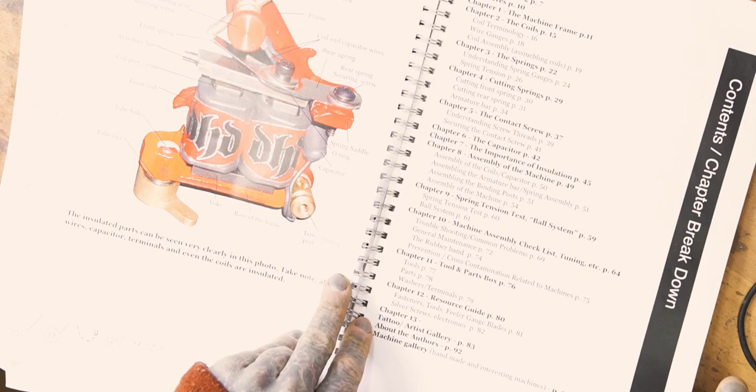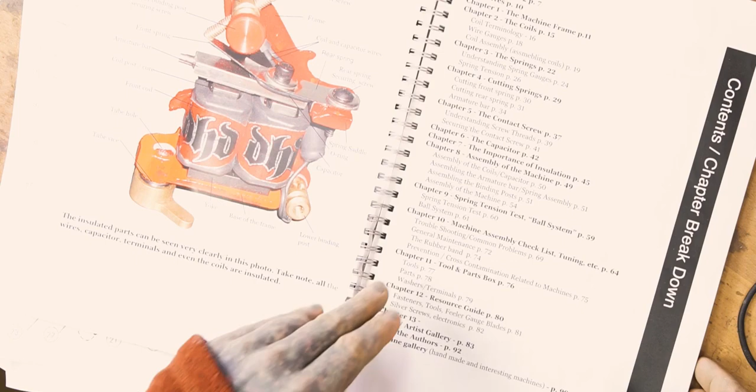I love it, you know. I'm all in for Godoy machines. And yes, as I say, I can recommend that book. It starts with machine parts. It's basically what we do. It explains where all the different parts on the machine are. And machine frame. So we basically go over the book with my own words to explain everything. So let's take a look into the machine.

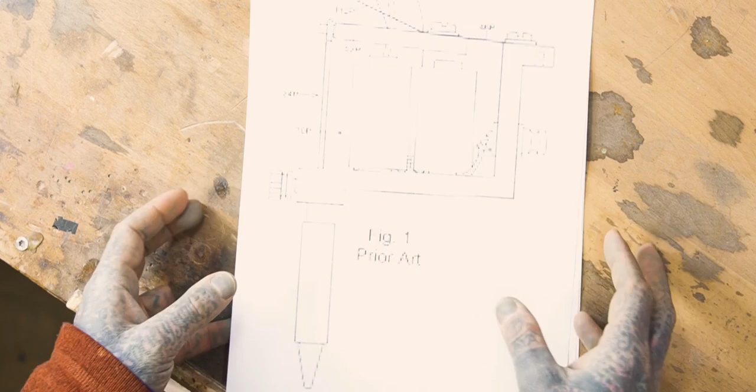I found a few illustrations on the internet, which I will use to paint on. Okay. So first of all, it's very important that you understand the tattoo machine in itself. How does the tattoo machine work? And I will show you that on the paper here. I hope you can see that properly.

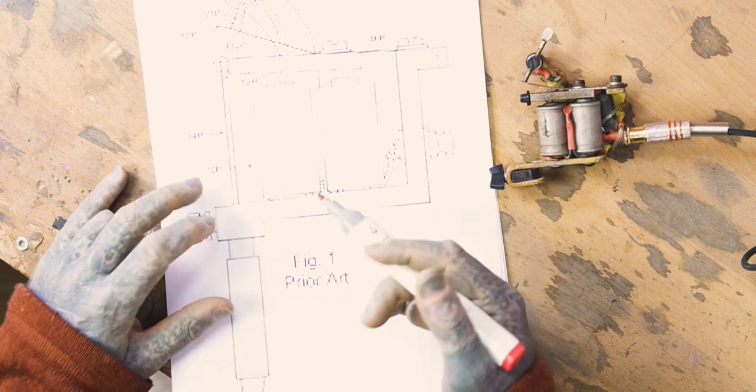So first of all, you have the frame. The frame is holding everything together. In the frame you have the coils. Coils are nothing else than an electromagnet. And it works pretty simple. Electricity goes in and it makes a closed circuit, and it makes an electromagnet here. The electromagnet pulls this metal piece, the bar, which is movable. It pulls the bar down.

And you see that in the moment it pulls the bar down, the spring comes off the screw. And that is where the electricity runs. So in that moment it pulls it down, there is no electricity running through it anymore. The electricity breaks off. And what happens when the electricity breaks off? The force from the magnets goes.

And you see when I let the force from the magnets go, the spring makes the bar jump back up. And in the moment it jumps back up, there is a connection again. So that means the electricity runs through and it repeats. And this is what a machine does very fast. It holds the electricity, it breaks the electricity. It holds the electricity, it breaks the electricity.

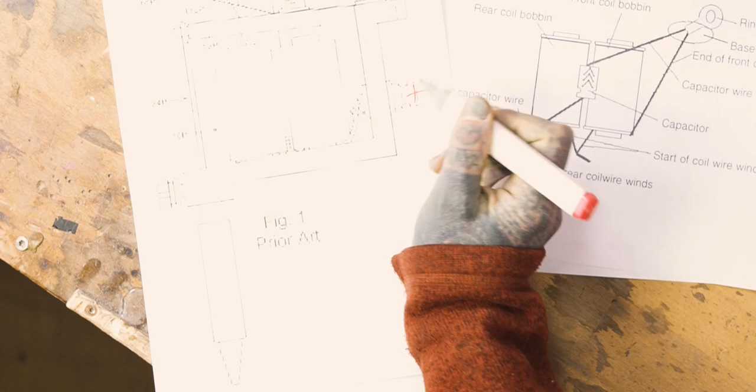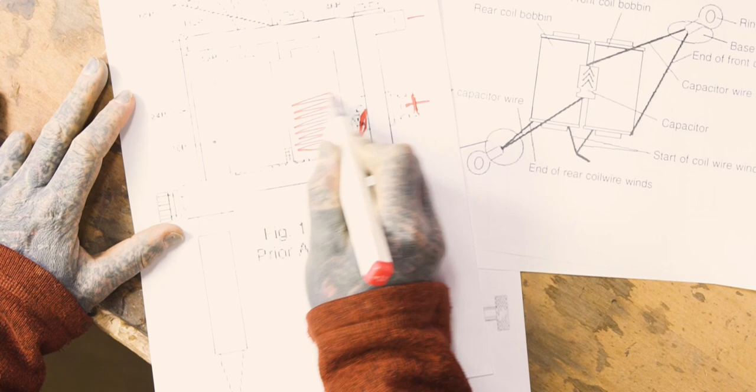Let me see if I have a better one where you can see the cables. No, I'll paint in the cables. So what happens? Here, let's say, is the plus and here comes the minus. And that cable runs into the coil. The coil is wrapped around, up and down and up and down, usually 8 times. 8 wraps, we will come to that later on.

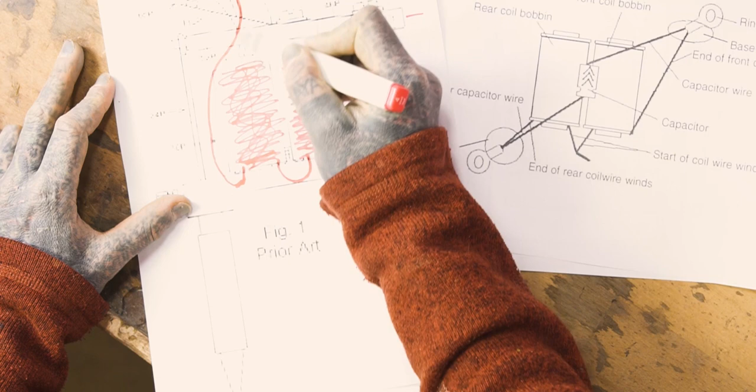And then the electricity moves on into this coil. Here it wraps the same 8 times, up, down, up, down, till it comes back to the bottom. So here, that cable moves up to the screw. And from the screw, let's go till here. And this screw is not connected to the frame. So this screw that comes in here in the machine is disconnected from the frame.

There's usually a little rubber inside here. I will show you that when we disassemble the machine. And we should see that on here. Yes, you see this part, let's mark it green. This part here is insulated with plastic or rubber, something the electricity doesn't run through, because you need to stop the electricity, because our minus from here goes into the frame.

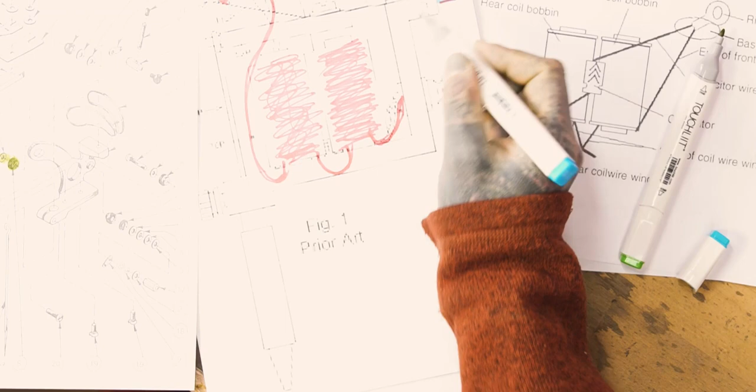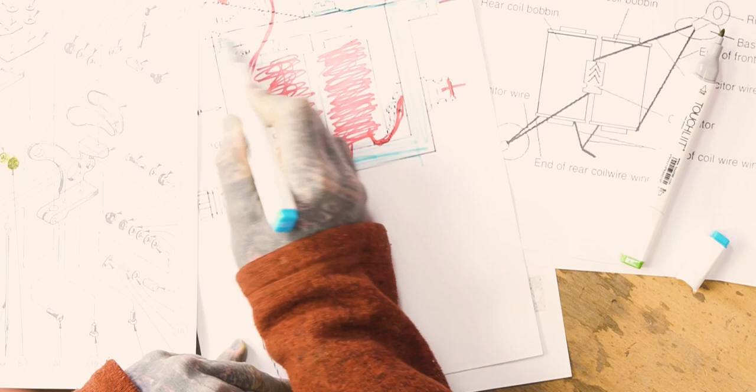So our minus is everywhere. Our minus is basically everywhere. It goes in here. And you see even the back, the full frame.

The full frame is blue, is full of minus electric. And also here, I forgot to mention, here you see there's also the green isolation. So it makes that the plus is not in the frame. The plus is only in the wires. And basically the magnetic field is also blue. And it doesn't matter, because when we later go to the core, the core is isolated. That wrapping here is isolated anyway, so don't worry about that now.

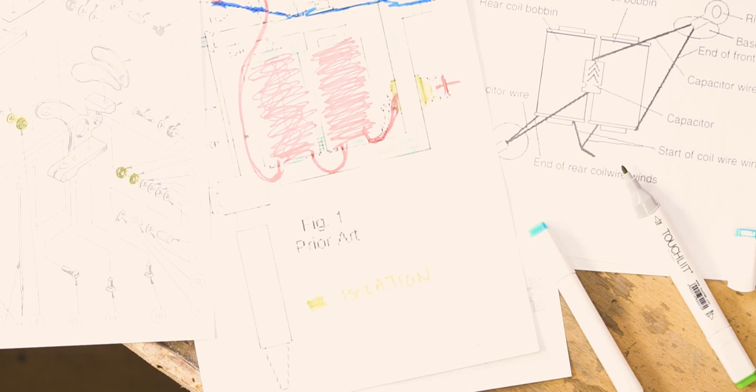So you see all the blue is where the minus comes in. And what the minus does, it runs in here. It runs in here. And you see here it connects. And in that moment it connects here, the electric circuit is closed. So in that moment the electric circuit is closed, we will have a magnetic field. And the magnetic field, magnet on.

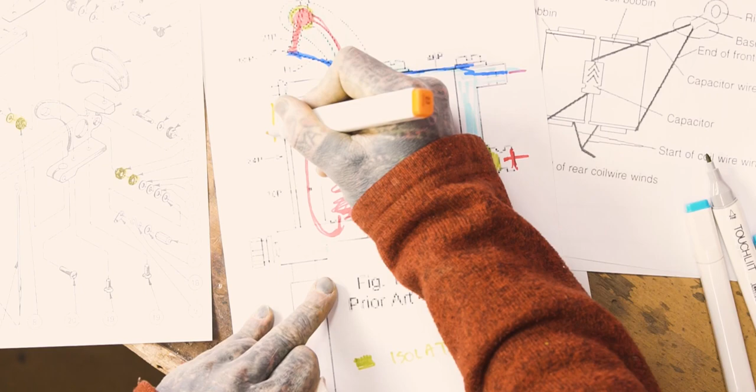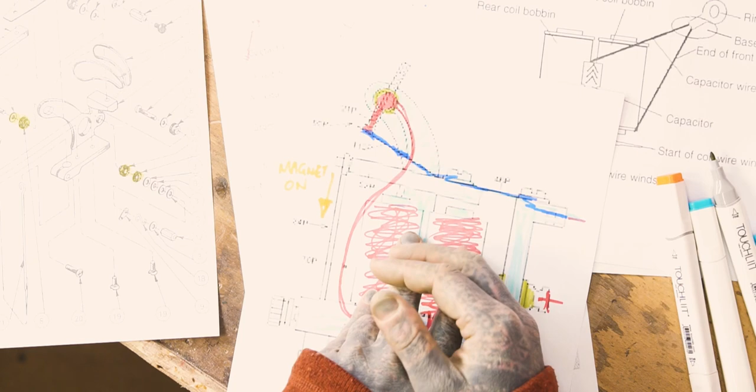The magnetic field is pulling the bar down. And in that moment the bar is down, we will lose the connection here. And in the moment we lose the connection here, the electric circuit breaks off, and there will be no magnets anymore, because the magnets are only there when electricity is running through the machine. So it breaks off, and the spring always has a little bit of force to the top. The spring will make the machine bounce back.

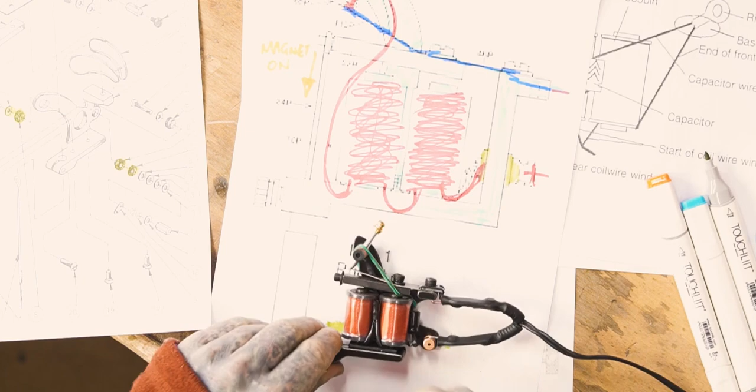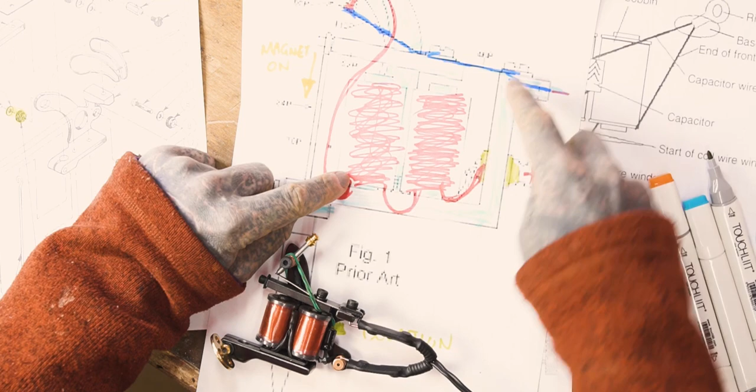And some of the very big beginner mistakes, it's good because one of these machines is not really working. This one, so we will find out later why. But I can tell you, most times there are some things. Sometimes you put a machine on and it sucks the bar down and it stays there. That means that somewhere the isolation is off, because there's a constant closed circuit. Let's say this cable here is connected to the frame, then you have a constantly running system, and you always have a magnetic field.

So that's one thing to figure out. Or let's say it's connected here, then you have it always running. But this does nothing. Oh no, it does something. Or maybe this just has a contact mistake somewhere. But they don't run good anyway. We will come to those machines later on. So you get the point how the machine works. It's very important that you understand how the tattoo machine runs. How the electric comes in here, runs through the coils, runs up here, runs through and back down.

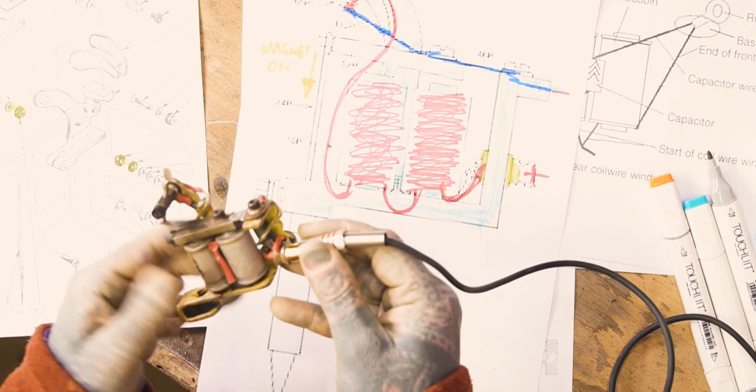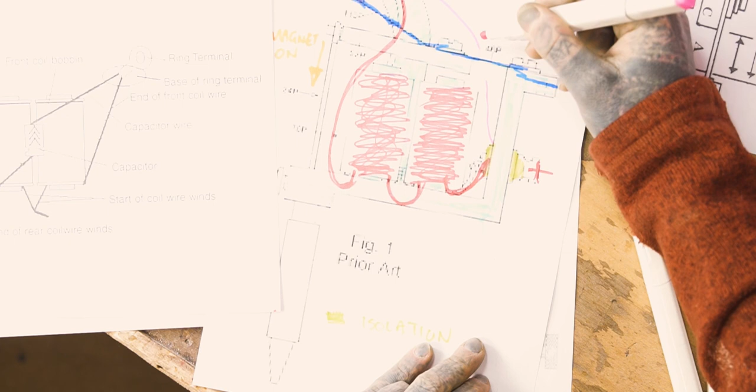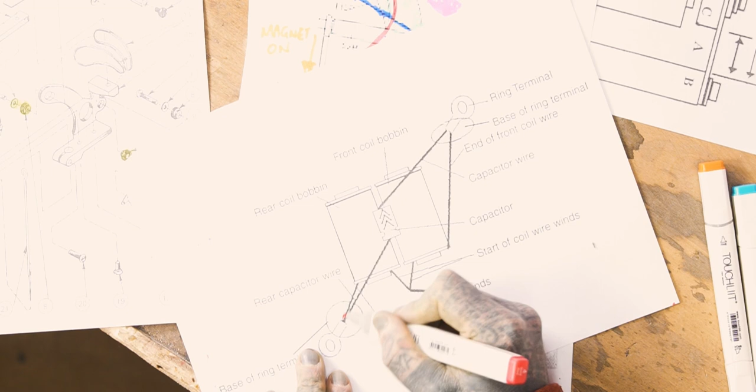With the Cinch it looks a little bit different. Maybe it's better to actually use one of the machines we will rebuild anyway, to show you better how that will look. Take this weird grip off. So there's one thing of the electric which I didn't forget, I left off, was the capacitor. And the capacitor is an extra thing which runs kind of from here to here. And I think here it's very nice to see. Here was the plus, and the plus goes like here.

And the capacitor, you have to think about it, it's almost like a battery. It's not almost like a battery, it is like a battery. But the thing is, a battery holds electric for very, very long, and a capacitor holds the electric for not long. Think about, you have a bucket of water and you put a little hole in it.

A small hole in the bottom. That is like what a battery is. A battery is like dropping the electric out, the water in that case. And a capacitor is when you take the bucket and you turn it around, so it goes woof. The thing is, a battery, when that bucket is closed on the top, you would need a long time to fill it with the water.

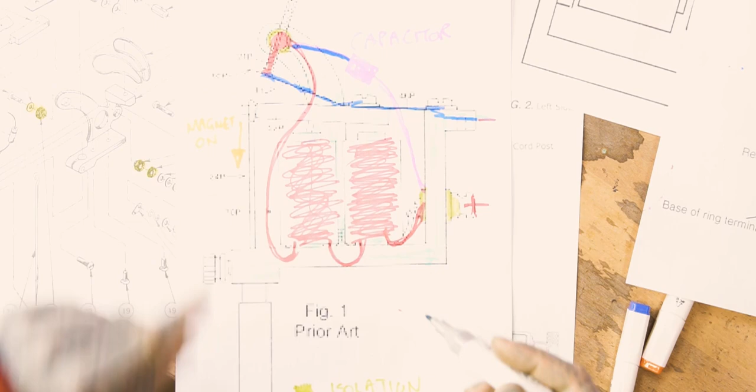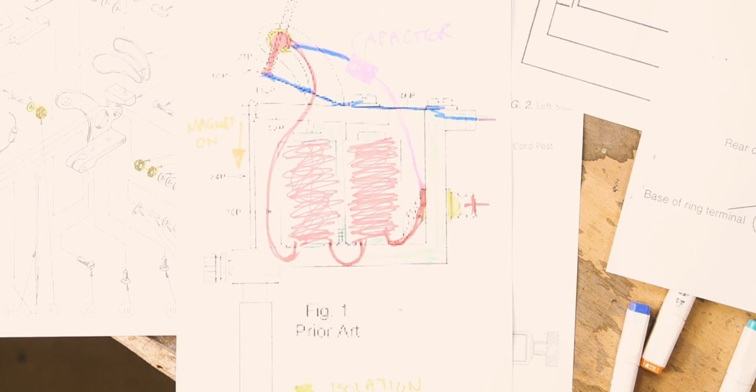So that means in that moment the electric breaks off here. Then the coils still have a little bit of reach to this side of the capacitor, and plus comes here. Plus is basically connected here. It has like this woof, little puff, and it depends on how much you put in. We will come to the capacitor later on, and I'll explain to you what makes the different things.

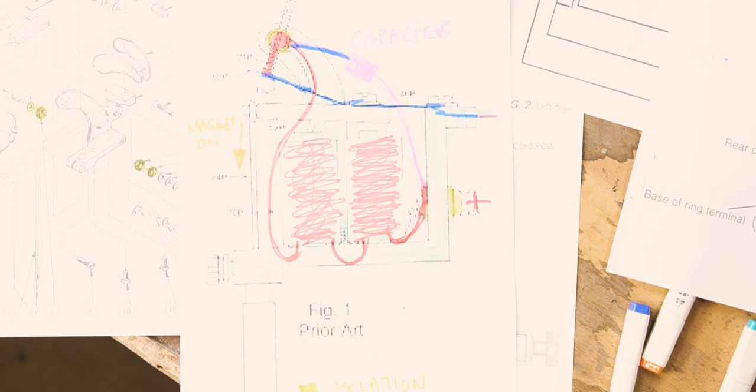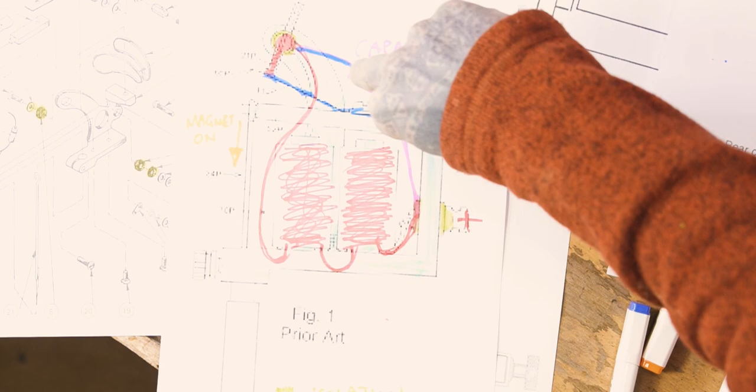But you have to understand, this is why a lot of people are confused, because it's like running beside the coils. But it's because it's like a battery. It's feeding the minus and the plus from each side, because like a battery, a capacitor has a plus and a minus. And that's also a very common mistake of a lot of people who start building machines. They put the capacitor in the wrong direction. Even a lot of times you can buy machines and the capacitor is built in in the wrong direction.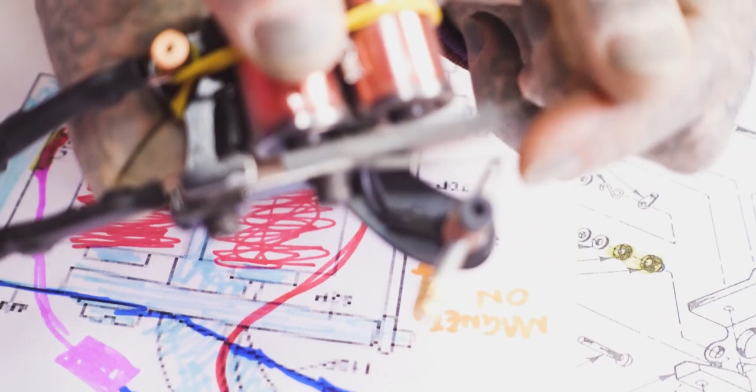And then you can see that very easily, that in the front of the machine, this one is actually working good. You can see then that on the front of the machine there would be sparks, like blue, white sparks, and they are there only because you have the capacitor in the wrong direction. It's like when you put a battery together, then there are sparks, and you don't want that, because it destroys your spring, it destroys your screw, and it makes the machine not run as good as it's supposed to.

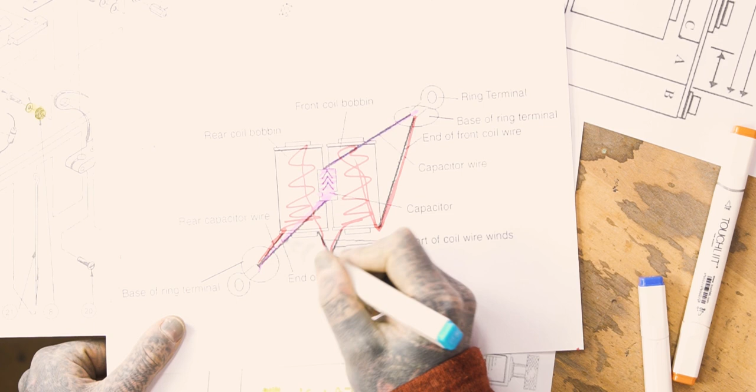And yeah, you can fix that so easily. If your machine is sparking, take the capacitor, turn it around, and that's it. A lot of machines you see on this diagram run the same, what they call the O holders, but some machines have the capacitor, you can buy it like this with the ring on it. Especially when you are too lazy to make the stuff by yourself, you can buy this from tattoo suppliers. Which, if you ask me, makes absolutely no sense, because all of the stuff is basic.

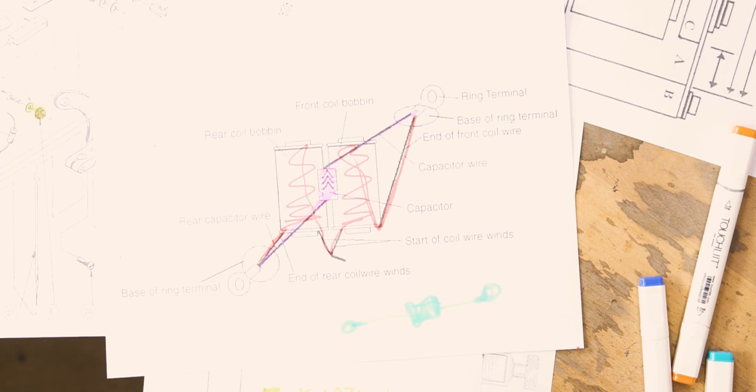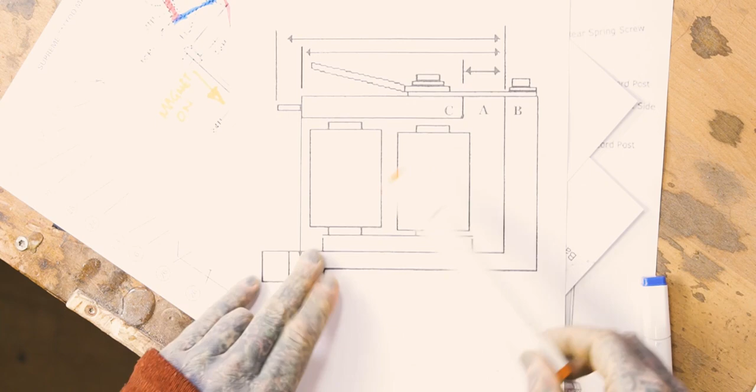It's all basic electric supply which you can buy in every little electric shop, you know. We will come to that later on. The first thing was just important that you understand the electric and how the machine works. We will come to this. This is how you set up the coils. This is the spring. You always have two springs, and I will tell you how the two different springs affect the machine setting. That's probably the one area where I spend 80% of machine building.

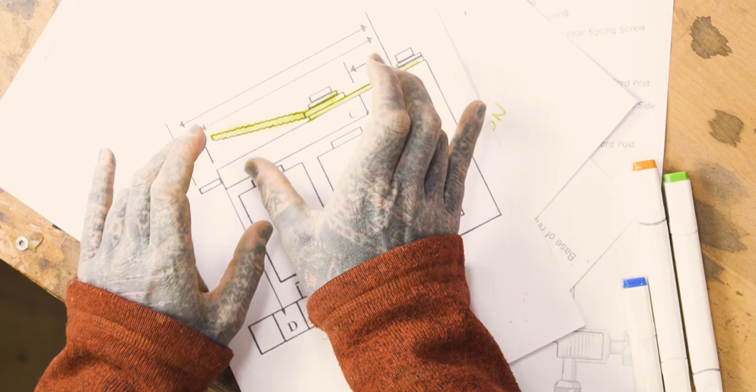So today we will just go roughly over it, but normally for my main machines, I spend 80% of my time in that part, just to have the springs perfect, because a little bit softer spring here, a little bit harder here, a little bit shorter here, a little bit less distance here, it makes a big difference, you know. And yeah, all you have to know right now is electric comes.

Electric is on. It pulls this thing down, magnet. And in the moment it pulls it down, the circuit breaks off and it bounces back, because they are bouncy springs. We will come to that later on. So that is how the machine works. I will add all these papers later on in my workshop.